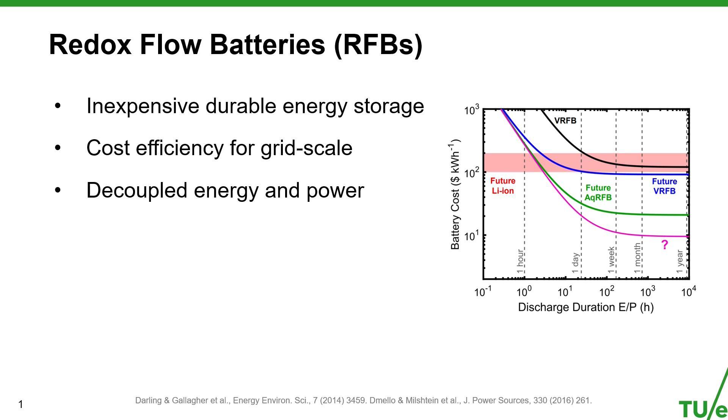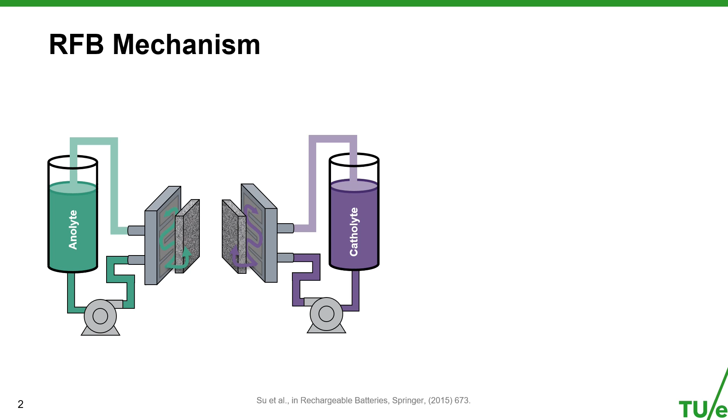So in RFBs, as I said, we have the dissolved species stored in tanks externally, and then it is pumped into the reactor. The first layer of the reactor is usually considered as a bipolar plate, which we also call current collector. And then on top of that, we have the embedded flow fields in order to distribute the electrolyte evenly inside the electrode. And then we have the porous electrode, which is the main component somehow, because that's where the electrochemistry happens. And then we have a separator allowing only protons to exchange, and as a result, we can have the charge out of the battery.

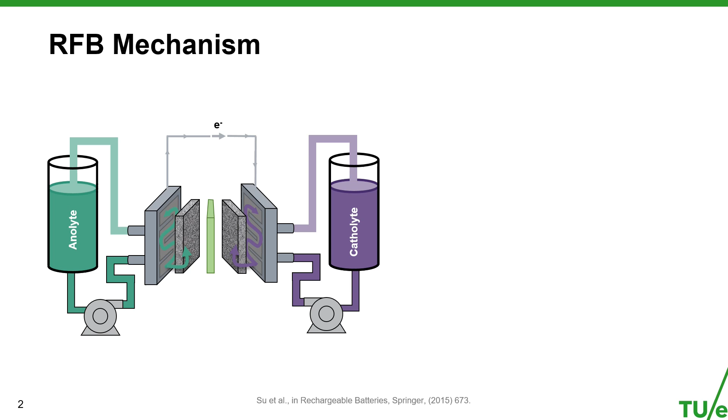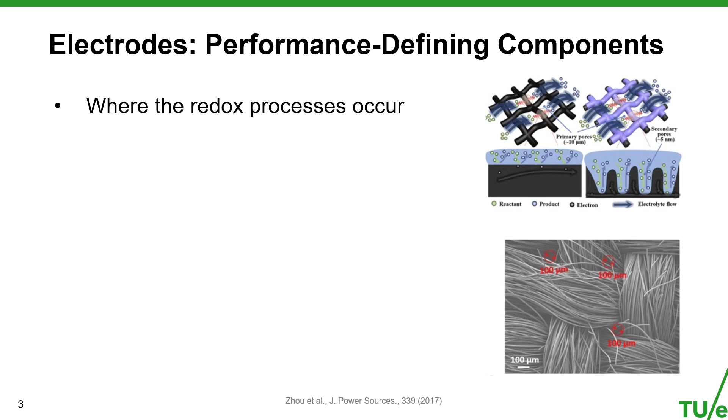So this is a very simple schematic representation of the RFBs, but in action, in lab scale or even industry scale, they usually contain more components, such as gaskets, in order to keep everything tight. So in order to increase the cost competitiveness of these systems, one approach can be increasing the power density. As I said, it comes from the reactor design and its components. So we can focus on increasing the efficiency of various components, and we believe that electrode is a performance-defining one because that's where the redox occurs.

So in this project, our focus is on tailoring the electrode and engineering it in order to increase its performance, both in the hydrodynamic performance and electrochemical performance. And for that, we have also two approaches. One is increasing the efficiency of the surface by tailoring the surface properties, which is more on a chemical side, but we have also an engineering side of this that is trying to optimize the structure in general, and microstructure in specific, of these electrodes.

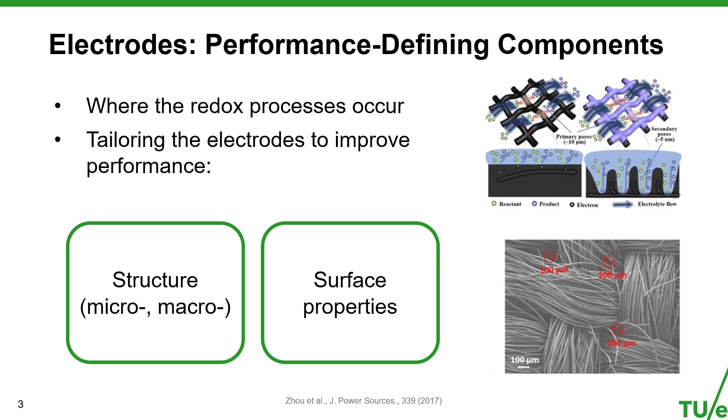So what do we actually want from these electrodes? For sure, we would like to have more surface area. Then it increases the electrochemical performance. At the same time, we want to have boosted mass transport, less pressure drop, because then we can decrease the loss, or the energy that we need to put into the pumps to circulate the electrolyte. And of course, we want to have more electrochemical and mechanical stability.

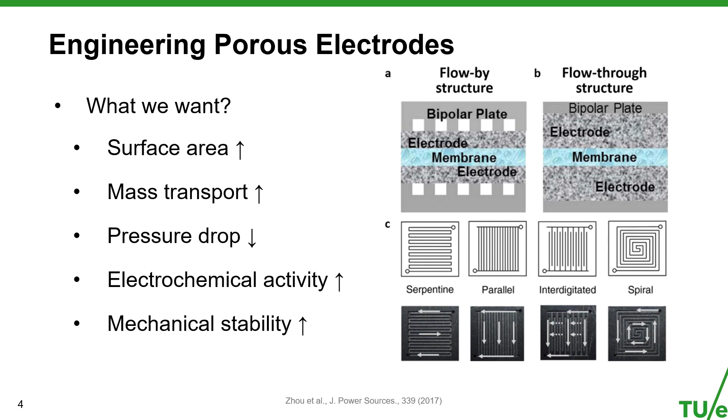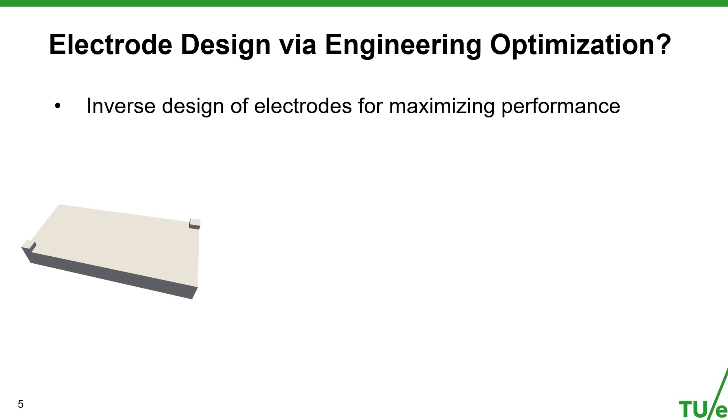So for doing this, we look at the problem as an engineering optimization problem. It means that we can probably do this using an inverse kind of design. And for that, let's assume that we start with a block of material, and then we perform topology optimization kind of techniques on that. So we come up with non-trivial designs, but at the same time, we also need to consider the next step, that is manufacturing. And we have also some ideas for that.

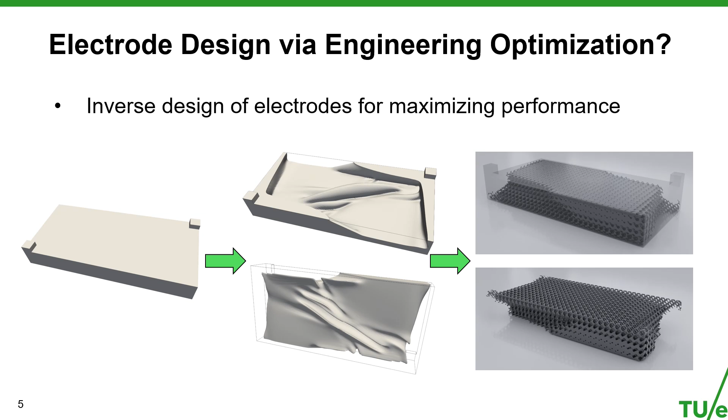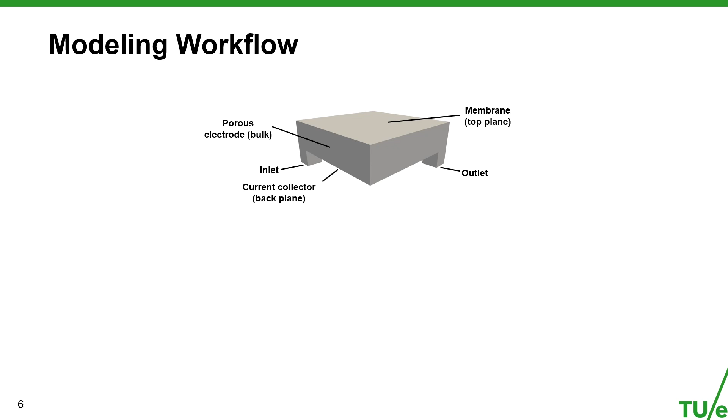So more specifically, the modeling workflow will be something like this: we have, as I said, a bulk of material. We can consider that the porous electrode is the bulk, and then we have the inlet and outlet. And because you will see this figure more and more in the presentation, you can assume that the membrane is on the top and the current collector is on the back face. And then the final result of this model is something like this, that we have topology optimization results converted to something that we can manufacture.

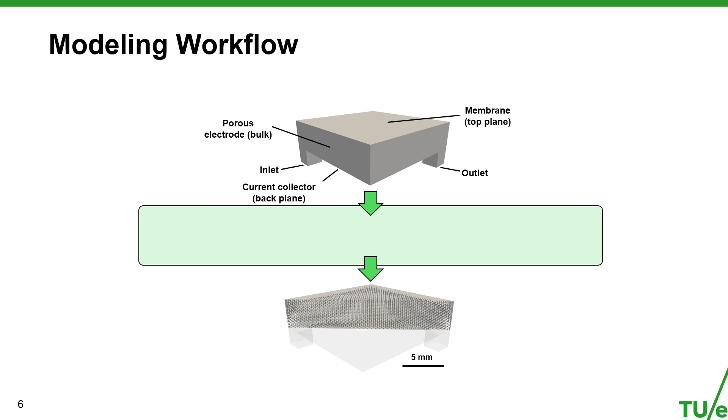And for doing this, we actually need some steps. The first one is a computational model that can correlate the microstructure and the properties of the electrode to the overall system performance that we want to put as a target in topology optimization. The next step is topology optimization itself. And then the final step is the upscaling and manufacturability.

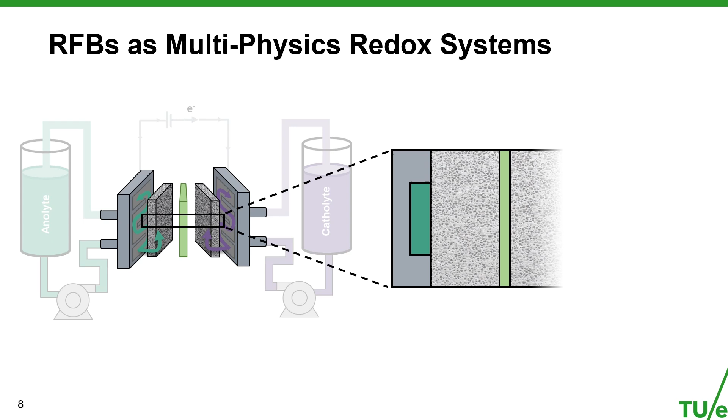So I will go through these steps quite quickly. The first step is the computational model, and for that, we first need to consider the fact that RFBs are actually highly multi-physics systems. They are multi-scale systems, but at the same time multi-physics. It means that if I focus on just one slice from one side of the cell to the other side, we will have something like this. There we have different types of transport phenomena: momentum, mass transfer, charge conservation, and heat generation and transport.

So for building the computational model, first we need to have a mathematical framework. From the figure that I showed you, we can consider the different things that we have in a flow battery. For sure we have momentum transport that can be nicely described by the Navier-Stokes equation. And then we have mass transport, which has different mechanisms in flow batteries. The first one is diffusion, described by a simple diffusion term in the Nernst-Planck equation. It can have reaction, any type of conversion of chemical species, or something like Butler-Volmer coming from electrochemical kinetics, and of course convection, that is the effect of fluid flow on mass transfer.

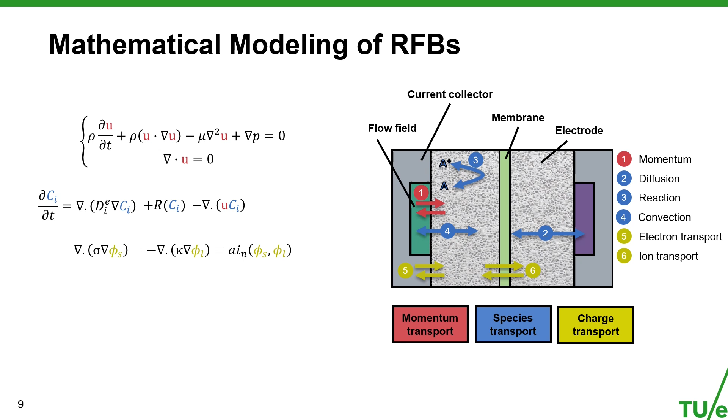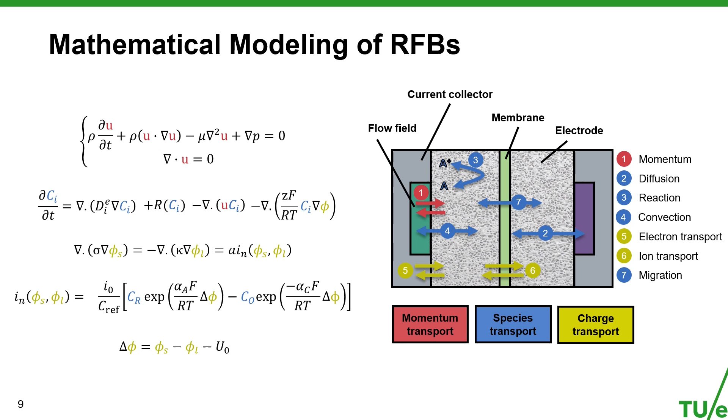And then we have charge transport, charge conservation, which can be defined using different forms of equations. In the simplest case we have a simple Poisson equation to describe the conservation of charge. And when we have charge, we also have migration, that is the effect of charge on the mass transfer. And then we can define different types of kinetics. We have used Butler-Volmer, which is usually the most accepted form of kinetics in this kind of system. So this is the mathematical framework.

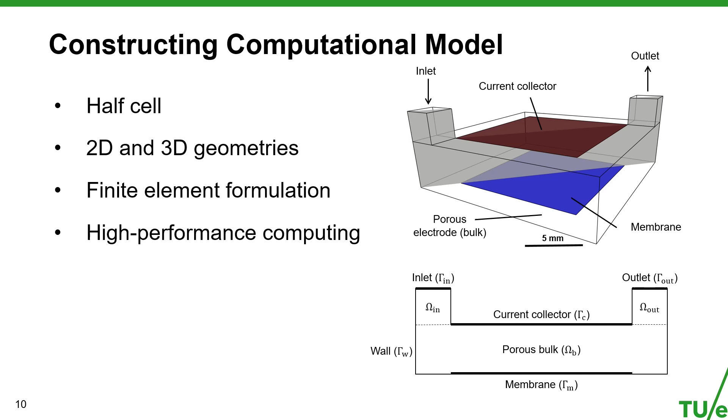Then we can move on to build the computational framework. For the study that I want to show you here, we have some simplifications: we have only a half cell of these systems. We have both 2D and 3D geometries, and we can consider both for topology optimization. Whenever I show you the 2D geometry, that's actually the diagonal cross-section of the half cell. We use a finite element formulation to discretize and solve the mathematical equations. And since we really need high resolution for topology optimization, we need to employ proper solvers, preconditioners, and these kinds of things using high performance computing techniques. So that's the computational model.

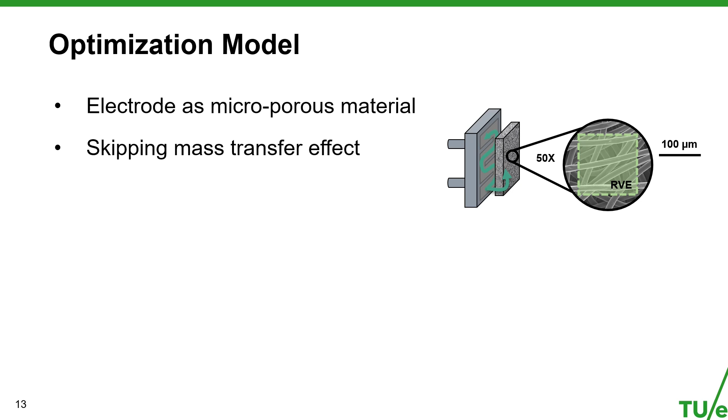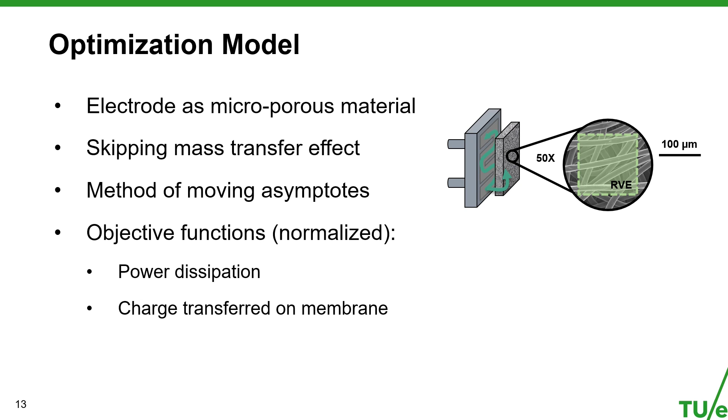But if we add fluid flow, then depending on the operating conditions, for example applied current density, the conductivity of the system, or any other parameter, the fluid finds its way through the electrode, either close to the membrane, especially when we have higher conductivity, or through the middle of the electrode, let's say.

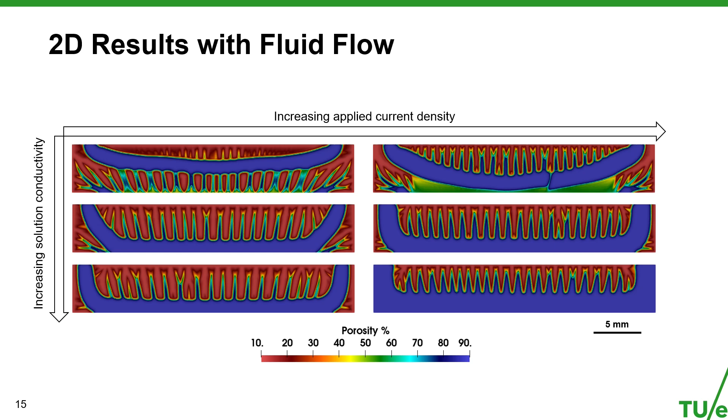And then the same type of results we can have in 3D. In 3D, it's a little bit more, let's say, intuitive, because we can say that whenever we have the demand for high electrochemical performance, like we have a higher current density, we need to have some material in between, like in the center of the electrode, but when you increase it, then the topology optimization routine, those mathematical equations, find the best place for the channel to be close to the membrane. So this can be also seen as somehow embedding the flow field inside the electrode.

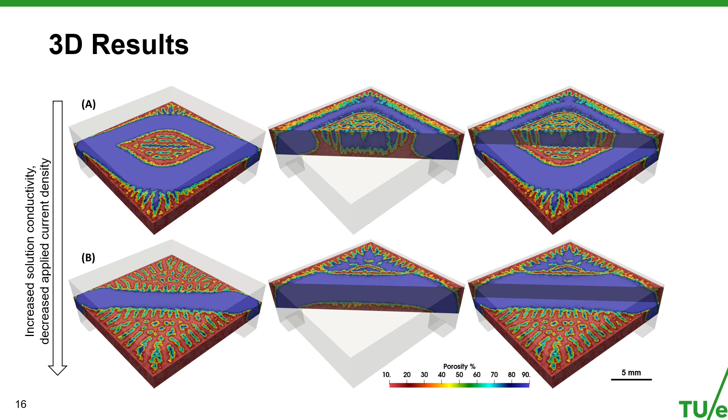And then these two phenomena that we're trying to optimize are actually quite contradictory. So whenever we want to improve power performance, like power dissipation, we actually have a loss in electrochemical performance and vice versa. And it can be seen here. So for the different optimization steps or iterations, we can see that these two phenomena are actually competing with each other, and in the end, the result is a kind of peaceful configuration of these two phenomena, depending on the operating condition that we have set.

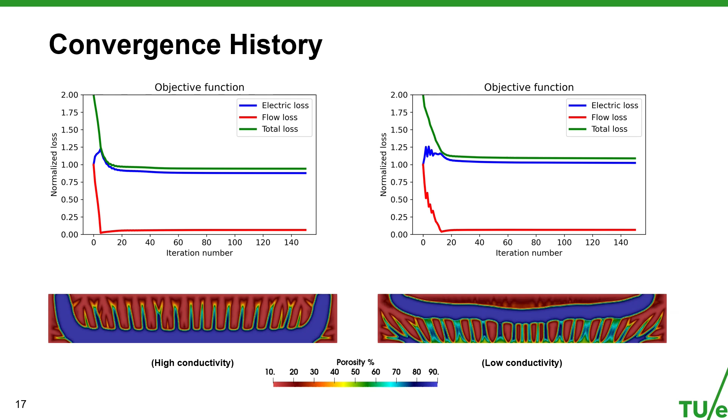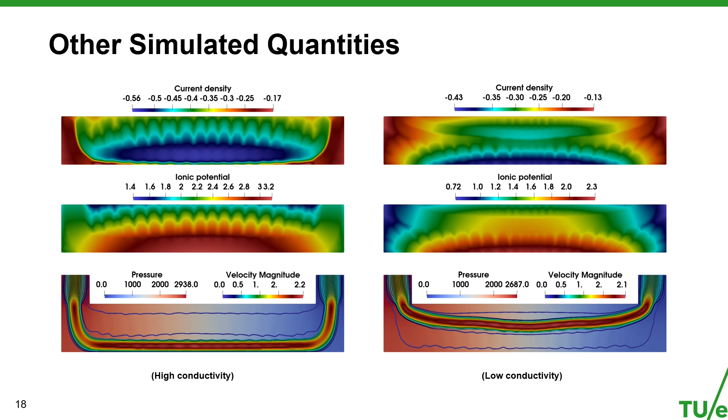And then since the first block was a computational model, we can have also all those parameters that we have in the equations as the output of the topology optimization. So when we optimize the structure, then we have certain, for example, current density or ionic electric potential, pressure drop, and also velocity magnitude, depending on the operating condition.

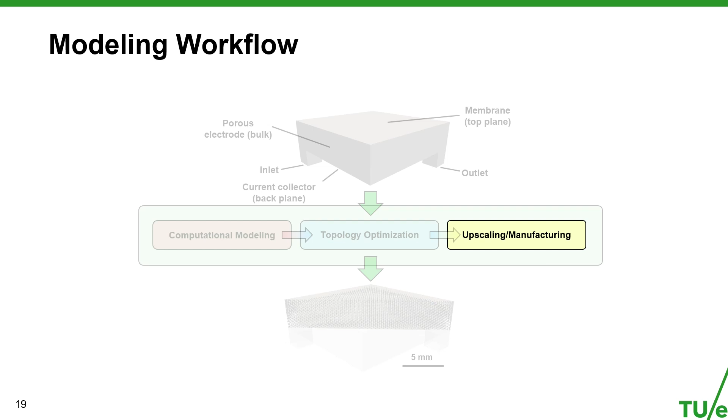And then the last block, which is also very, very important, is how we want to move on with this. That is, the optimization results, and then so what? So how we can produce them using techniques like additive manufacturing. So the upscaling strategy for us, the idea is we can use periodic surfaces in order to make them. So here is the concept of TPMS structures, triply periodic minimal surfaces, which are mathematical entities using trigonometric functions that are getting quite popular in mechanical engineering and biological studies, but also recently in chemical engineering. And the thing is, we can control the features of these surfaces quite simply by changing the coefficients of the mathematical equations. So the challenge here is how we can convert those porosity fields into something that we can produce using the TPMS.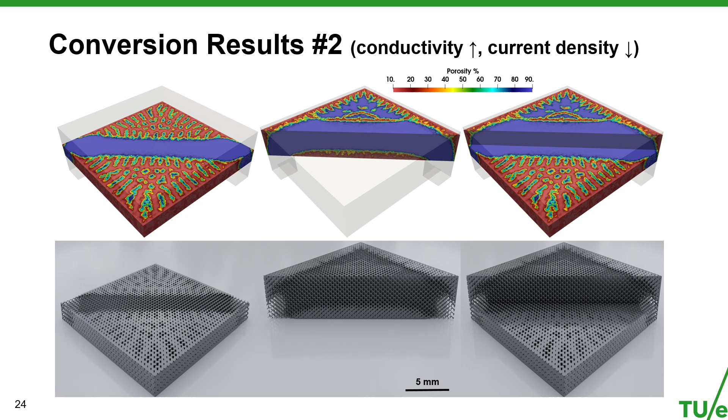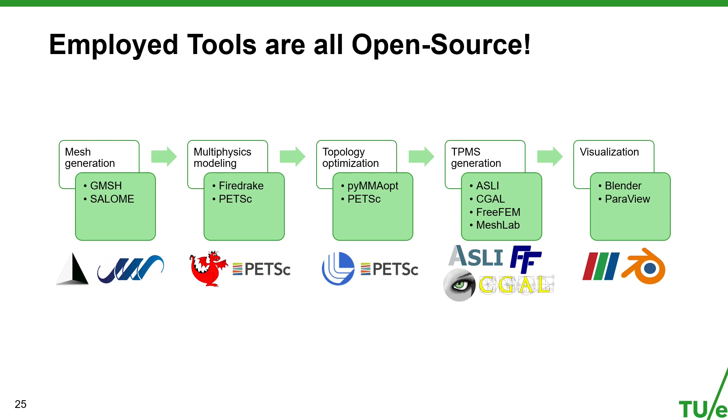And then another aspect of this work is that all the tools that I use in the different steps of this modeling framework are all free and open source, and it means that the workflow is fully reproducible for anyone that is interested in using them. So for mesh generation, multiphysics modeling, optimization, and also conversion to TPMS infills, all the tools that we use are open source.

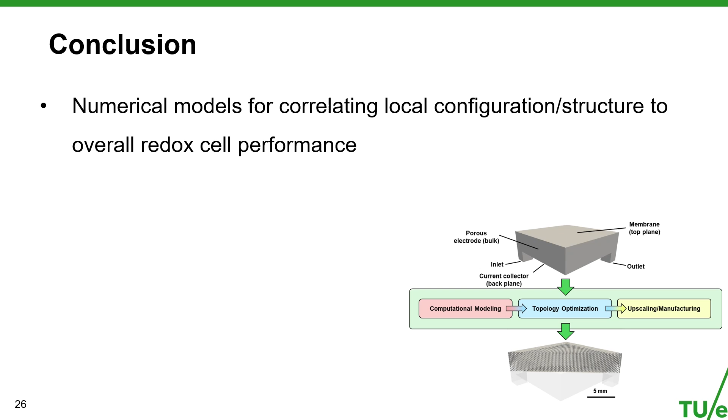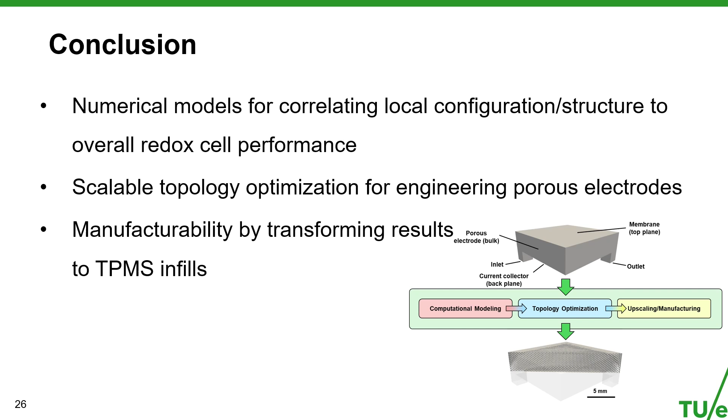So as a conclusion, I showed you the idea that we can have different blocks in order to start from a porous electrode and then move to the final optimized version. So in the first place, we need a numerical model that, as I said, correlates the properties of the electrode to the overall cell performance. In the next place, we can plug these models into optimization routines. And then finally, we have also some ideas for how to upscale and manufacture these results. Yeah, that's what I wanted to say.